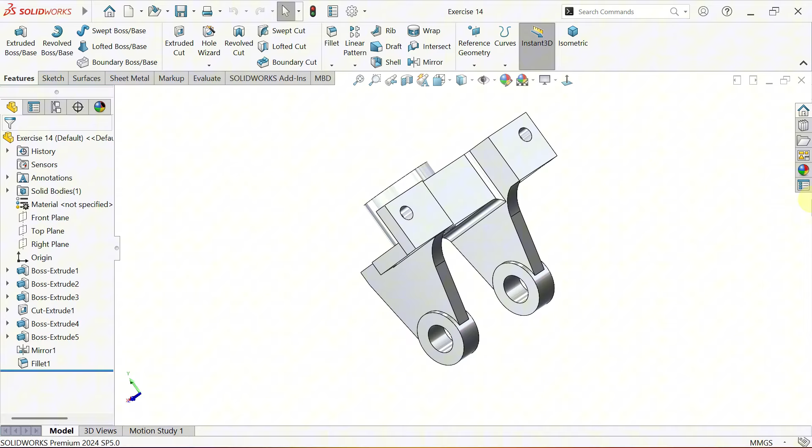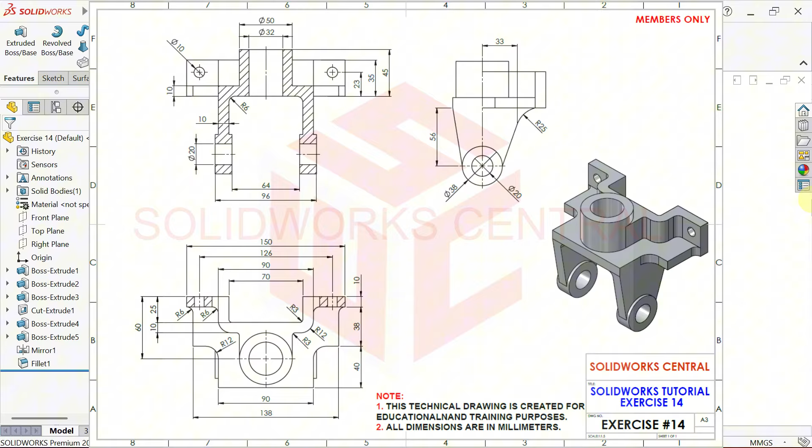In this tutorial, we'll model a slightly more advanced part step by step as part of Exercise 14. We'll begin by creating a sketch and then build our model by applying multiple extrusion depths to form the overall geometry. Today's commands include Extruded Boss/Base, Extruded Cut, Mirror and Fillet. This exercise is perfect for anyone looking to improve their modelling skills and practice combining several solid features. Ready? Let's get started.

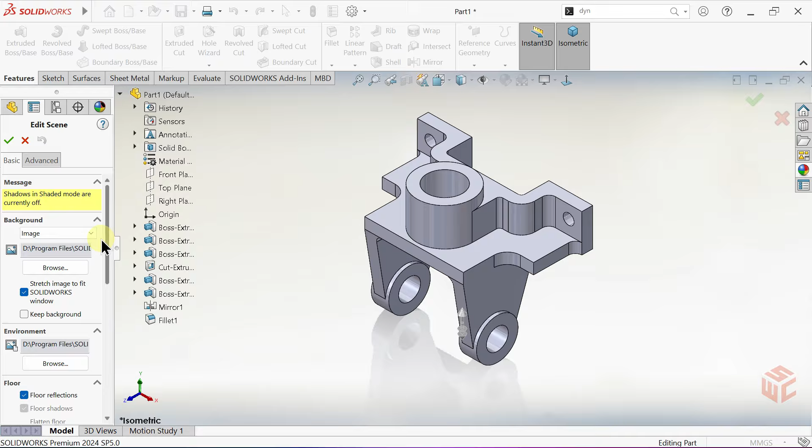And that's how we've completed our Exercise 14 model in SolidWorks.